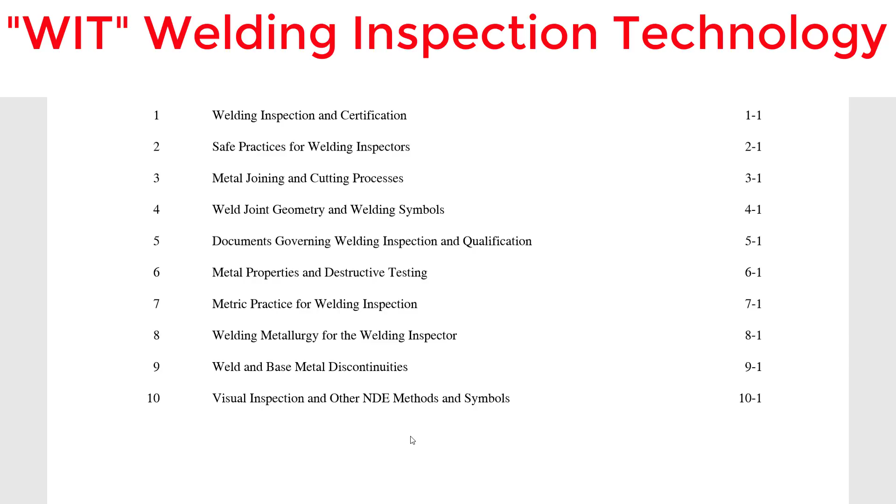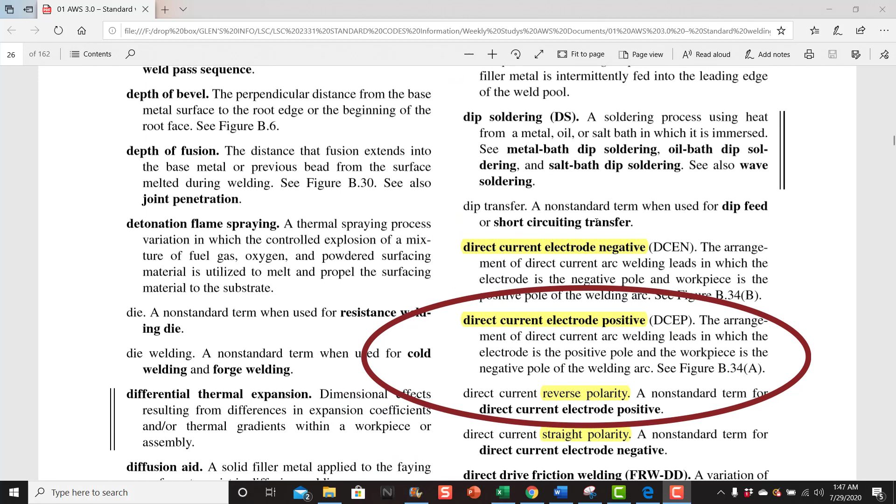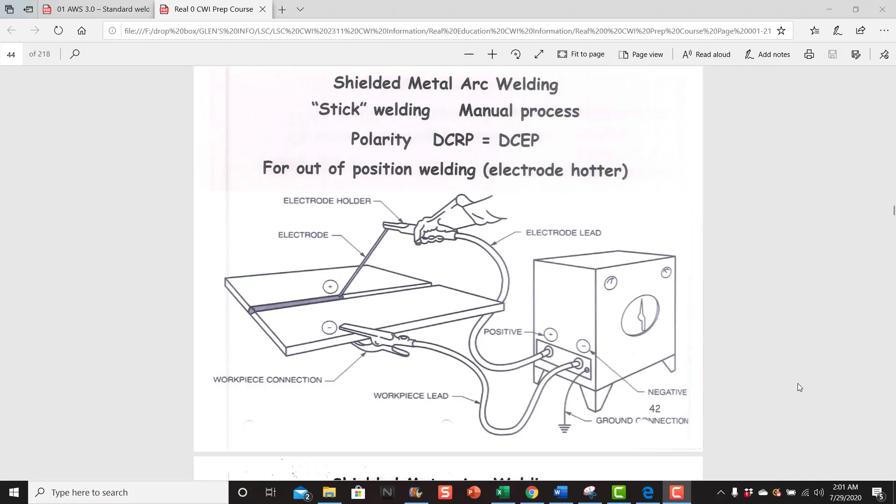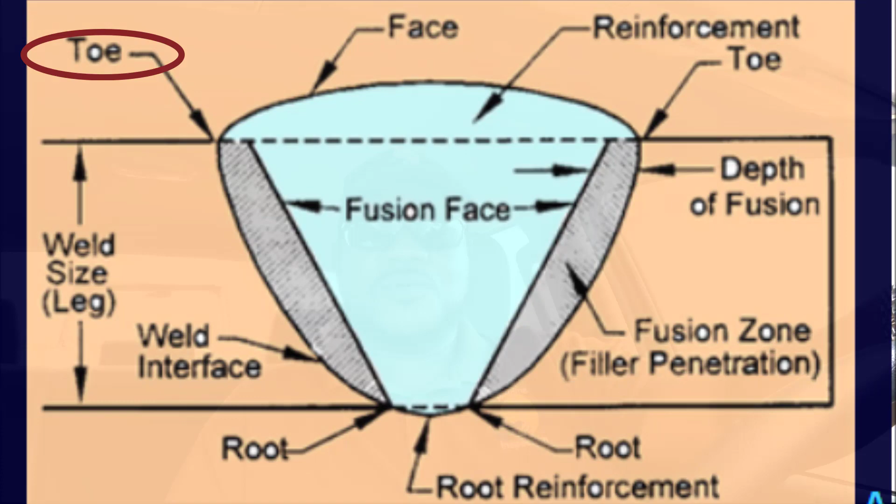The first thing you need to do is study AWS 3.0, terms and definitions. You really need to understand how to communicate with people. When they say DC electrode negative or DC electrode positive, you've got to know what they're talking about, especially when they say DC EP - that's direct current electrode positive. In the field, we call it reverse polarity, or you could say DC plus. There's certain ways and different things you can use, like weld reinforcement - out in the field, they call it a cap. Some people don't even know it's called weld reinforcement. You've got to know where the toe of the weld is at when you're communicating with people. So the AWS 3.0 is terms and definitions - learn all about that, learn the definitions so it's easy to communicate.

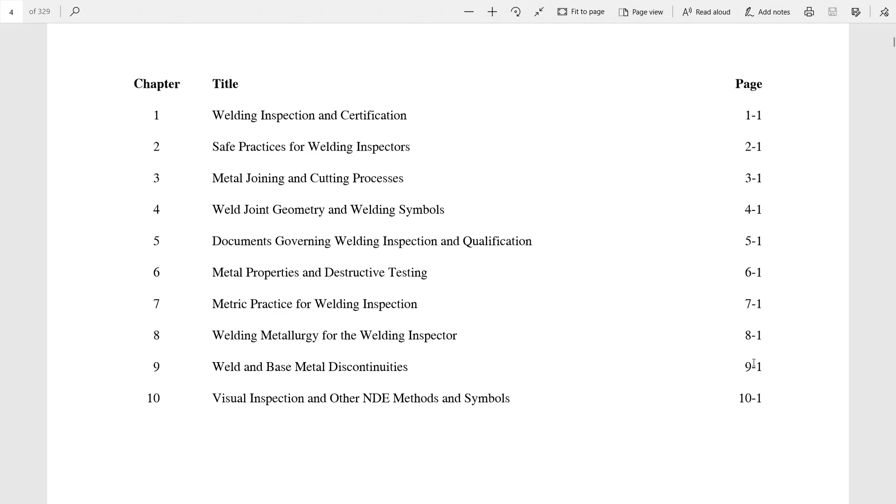And the first thing you want to study is your WIT, and you need to study chapters 1 through 10. You need to know your weld symbols, you need to know your metallurgy, you need to know heating and quenching and tempering, converting millimeters and inches of your heat input. It's a lot of stuff you need to learn.

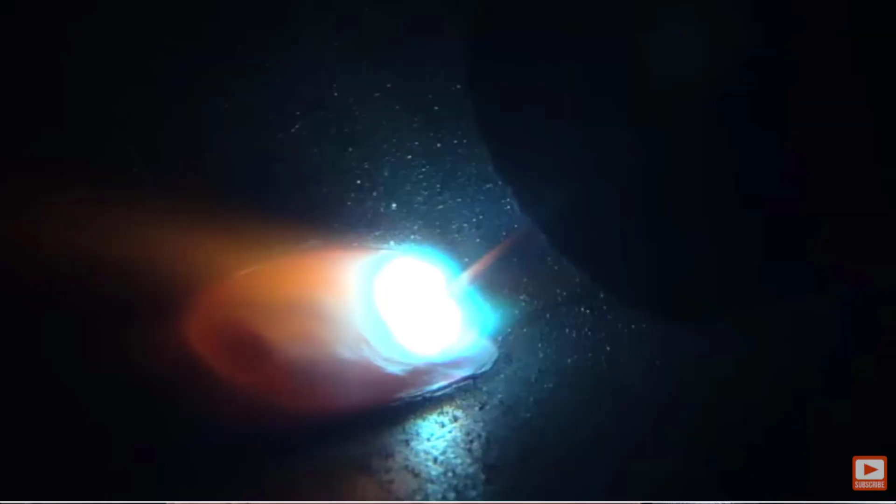Because you know how to weld doesn't mean you can go and pass this CWI exam. It's not that easy, especially for the older guys.

Now, like I've seen in my previous videos, you go in, you take the seminar through AWS, Real Education, Baseline Data, wherever you want to go. It's a week, 2-week seminar, and what you do, you take your part B in class. And you don't get your results from your part B until you take A and C. A and C have to be scheduled at a Prometric site, and these sites are all over the United States. So you can go and sign up, but you have to take A and C on a computer. I know this pisses a lot of older guys off because they don't even want to turn on the computer. New times, new things you have to do, so you just got to adjust with the system.

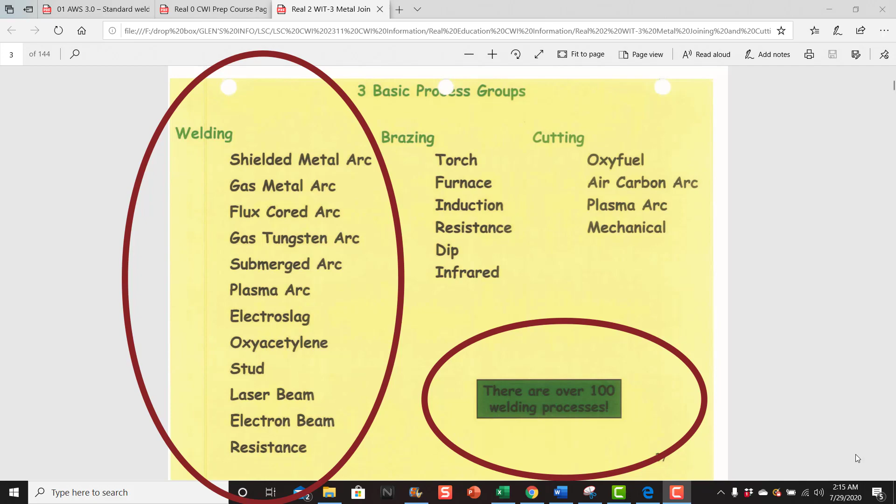And another thing about bad habits - people, because you know how to do shielded metal arc welding, they call it stick welding, doesn't mean you know how to do TIG welding. There's over 100 different processes, and about 12 of these will be discussed in this WIT booklet. So a lot of people weld stick, but they don't know nothing about TIG. A lot of people weld TIG and don't know nothing about MIG. So as a CWI, you've got to understand all of this stuff. You don't have to be an expert in any of it, but you need to understand it, especially if you're going to take this CWI exam.

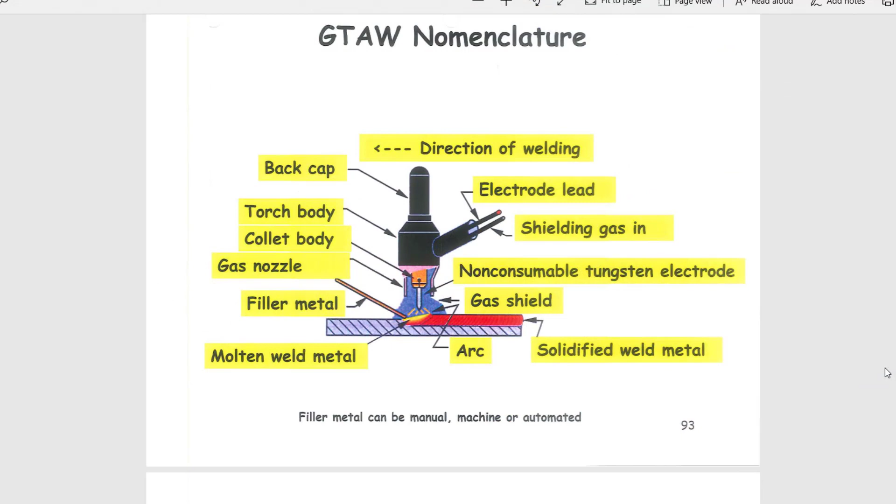So the first thing you want to do is study your part A and make sure you understand what you're studying. I can break all this stuff down, but I've got other YouTube videos you can look at that would break all your numbers down, how this stuff works. And if you want to take some of my quizzes, look in my description below - I have quizzes over tests of part A, B, and C.